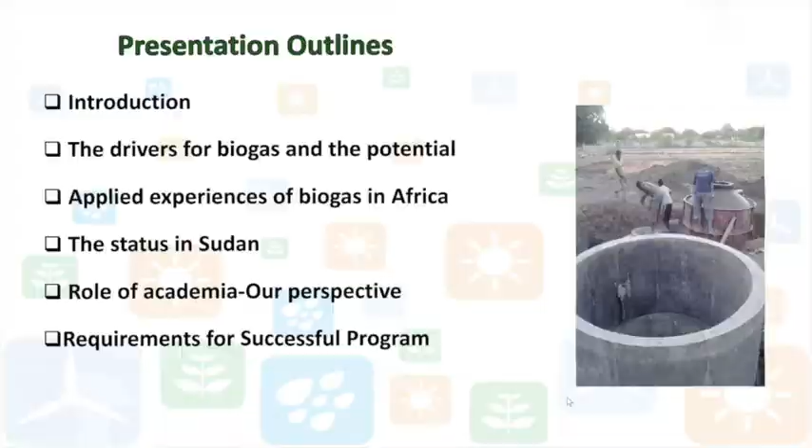So why is the development of biogas? Actually, I'm a mechanical engineer, and my PhD was in biofuels, producing biodiesel and biofuels and testing internal combustion engines. I finished in 2013. But in 2014, I went to Sweden to attend the WBA conference, World Bioenergy Conference.

And then I was very inspired by the Swedish experience in biogas. From the airport to the regional city where the conference was, the biogas buses were running on biogas. And in the field trip, we went to a biogas plant where a group of farmers, like entrepreneurs, collect the cow dung from different farms and bring it to the biogas plant, and they produce biogas. They upgrade this biogas to be fuel for the station, for the cars, and they also have a certified organic fertilizer.

And I was thinking, Sweden, with all the population in Sweden, it may be less than the people in Khartoum, the capital of Sudan. So we have a lot of waste. We have a lot of the biggest livestock in the continent, and also we have many other things that we need to do.

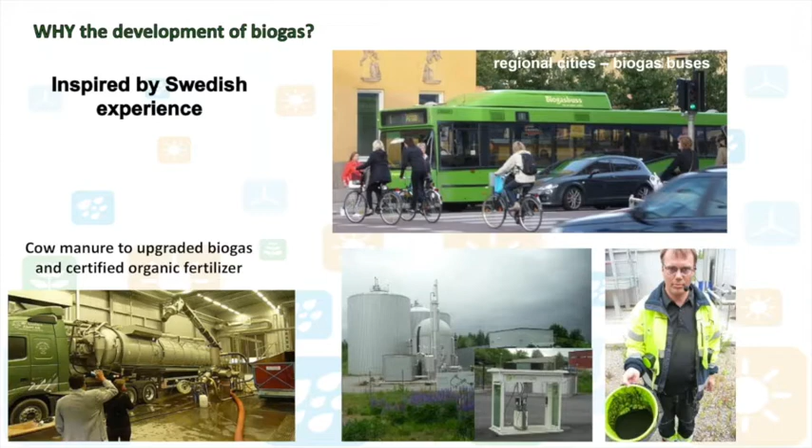So the first thing I looked at was the experience of biogas in Africa. I think most of you know the Africa Biogas Partnership Program, created in 2009, which is a public-private partnership between the national government in the country, and also with other organizations in Netherlands, like SNV, which is famous as a technical advisor for doing this in West and East Africa, and also the government of Netherlands, mainly the Ministry of Foreign Affairs.

So they established the Kenya Biogas Program, the Tanzania Domestic Biogas Program, the National Biogas Program in Ethiopia, and the National Program of Biodigesters of Burkina Faso. And they have a lot of successful stories - they installed many different biodigesters to produce biogas, mainly for households and rural areas, and maybe thousands of them are working now.

There was also a National Domestic Biogas Program in Cameroon, also supported by SNV, and a National Domestic Biogas Program in Rwanda, established in 2007. And also there are different initiatives in South Africa, Zambia, Sudan, and many other countries in Africa.

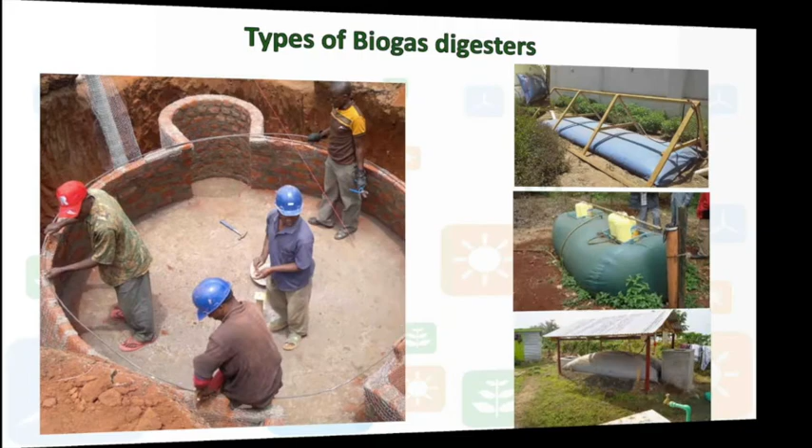And this is another type, an underground Chinese design in Zambia, shown in the left photos - different designs, but at the end doing the same job. And also this one in Tanzania.

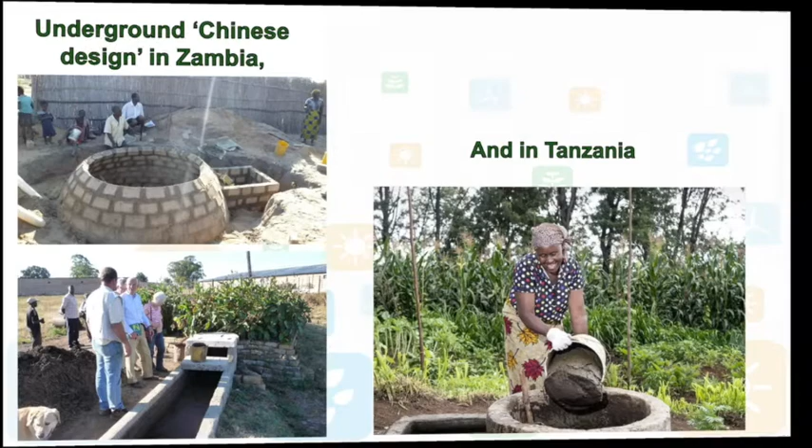The application of biogas is mainly for cooking, as we can see in the photos, and also for using biogas lamps. Sometimes the biogas is not enough for cooking only, so some people look for other solutions for lighting, but in the end we can use biogas for both lighting and cooking.

The benefit of biofertilizer or bioslurry can be used to promote home gardening and also increase the crop yield at different levels.

So I'm going to share some experience of biogas. This one is from Kenya, and this man is using the balloon, what you call it, flex bag biogas. Actually the design is originally from Rwanda. They produce the biogas on their farm from food waste and agricultural waste, and they compress this biogas using the compressor in the photo, and sell some of the compressed biogas to families as a substitute for LPG, and some of it they use as fuel for rickshaws, as in the photo.

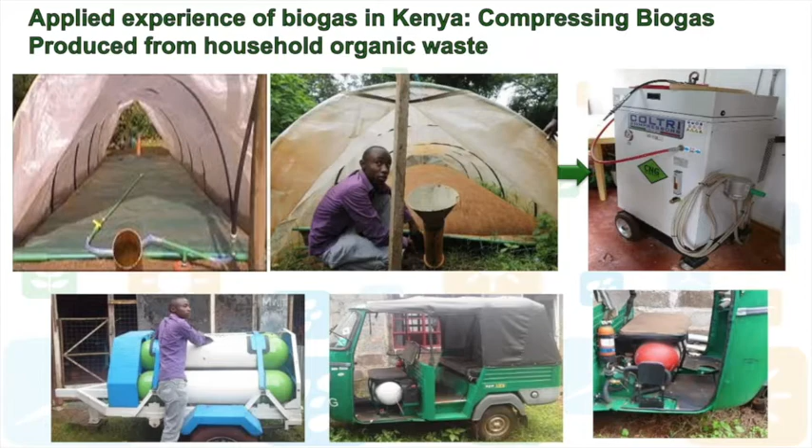This is another type, in a slaughterhouse in Kenya also. It's a very successful story - we went and visited this plant, it is a big one. They are using the waste from the slaughterhouse in a biodigester, which is the photo with the red and green. It's a Chinese design, also underground.

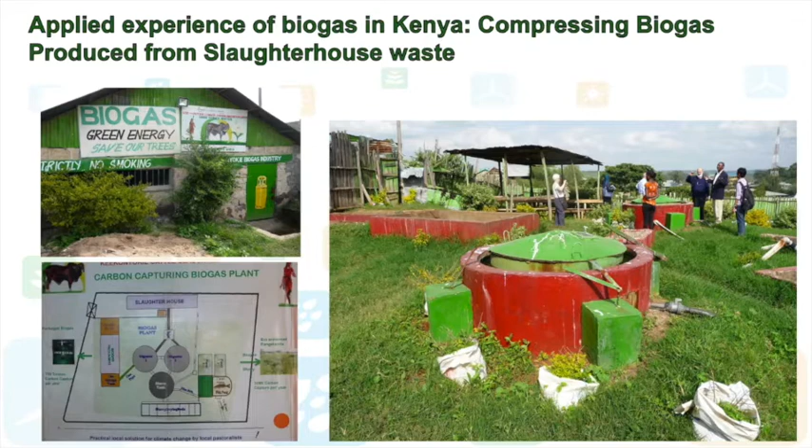So they use this to compress biogas - they developed these compressors on the left, designed by them, and if you can see, this is a small LPG unit. They distribute this LPG to the neighborhood as a community responsibility, because the slaughterhouse is big. They also use it inside the slaughterhouse to produce electricity with the generator on the right hand.

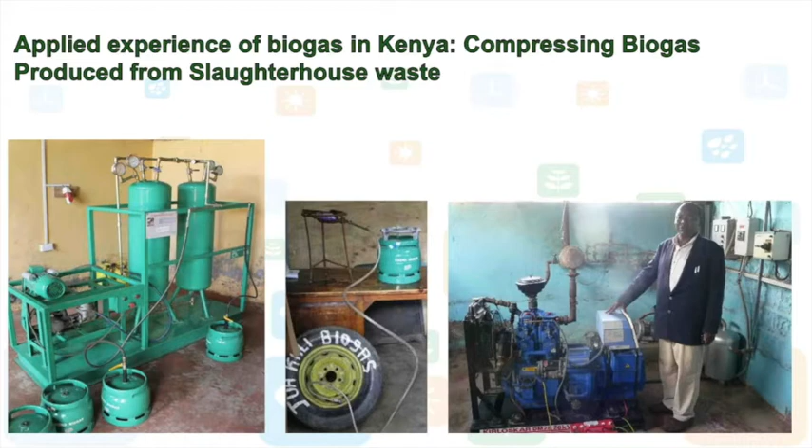The LPG shortage is now more than 42%. So we are importing, and using this mainly in the big cities. The rural areas are suffering from not having access to LPG, especially since Sudan is a big country, and LPG cannot reach rural areas. Now we are facing, even in big cities like Khartoum, people queuing to get access to LPG.

We also have increasing population growth - the annual change in population growth is 2.4%, which means the needs are increasing. And we have very fragile economic conditions to provide foreign currency to import more petroleum products, and so on. So we need options for self-sufficiency in the country. This status can also be applied in many other countries, to some degree, across the African continent.

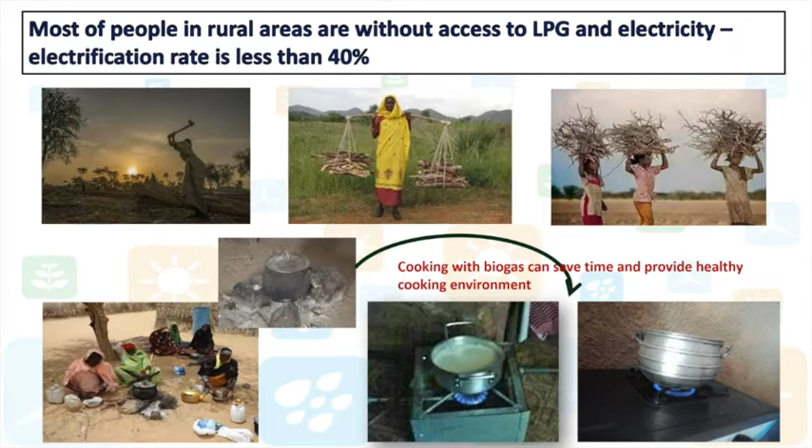Sudan is also suffering from a high deforestation rate, 2.2% per year, from using up to 30 million cubic meters per year of fuel wood. These photos are from different parts of Sudan, from the north, the middle, and also the east of Sudan. So how can we expect these areas will look in 20 or 50 years?

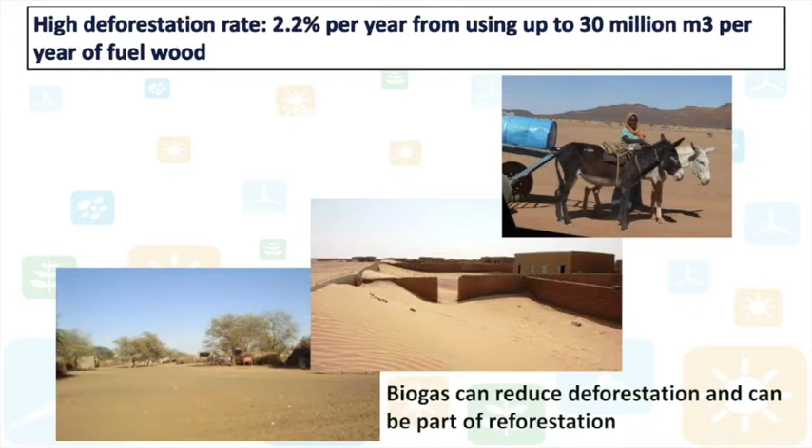So what was our approach? The very thing that we have done in late 2014, early 2015, that we called for a stakeholder consultation workshop.

We tried to understand why there is no development of biogas program in Sudan. So we brought all people that have done any activity in biogas, from academia, from the research institute, from private sector, and also any companies installing biogas units. We found just one company that started in Sudan in like 1980.

In this stakeholder consultation workshop, the main objective was to understand the barriers and prioritize the needs for developing biogas in Sudan. So we should have the need and the potential to start this program. After this workshop, we established our biogas research group, formally formed and sponsored by the Deanship of Scientific Research in Sudan University of Science and Technology.

So the second thing is to build real models and tell successful stories. Why? Because one of the things that came out from the workshop is that people are not aware about the potential of biogas.

The other model that we built in 2017 - going back to the last slide, that first model was built, but the cost was very high. It was really high because the cement, the labor, all this stuff increased the cost. So to promote the technology, we wanted to have cost-effective models.

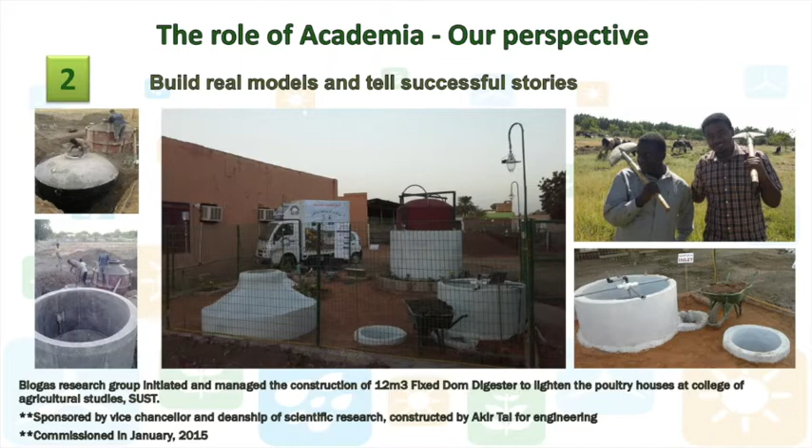We also tried to see the impact of different feedstock, like cow dung, and also a mix of cow dung and slaughterhouse waste, and also food waste available in the cafeteria at the university - different feedstock. So we tried to see the pressure of the gas at different levels and different temperatures.

We wanted to ensure that if this model was cheaper, would it still have a positive impact on the family? This 2 cubic meter biogas digester was also installed in engineer Faisal's house, rahimahullah.

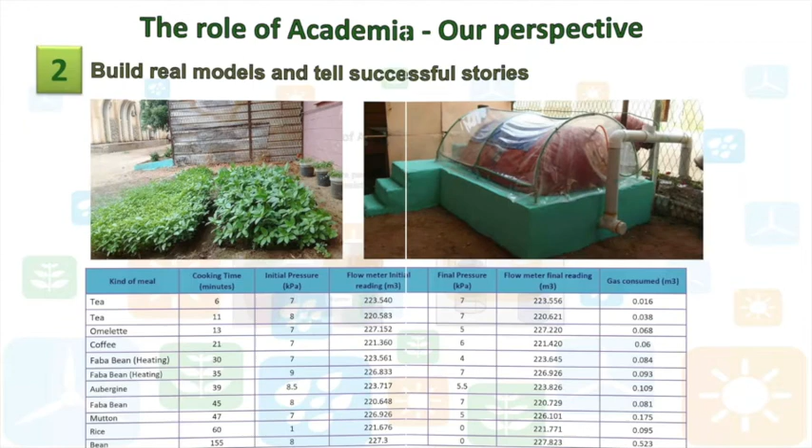Then we tried to do our research, and because we built these small models - another thing we are proud of is that we have our own biogas research lab. This lab was not only for doing research, but also to help other researchers from other universities and institutions come and do their research and understand how they can fabricate different models.

So we started with this one, and later we developed this one because we wanted to create solutions that are part of the community's daily life, culture, and their usual business - mainly to avoid resistance.

So this biogas unit in the photo was made mainly from a water tank available in Sudan. We use 250 liter.

We did all this after we finished our experiment in the lab scale, then we turned to this one with the research group, and we found it very good and useful to produce amount of gas. Yes, it is not enough for household, but we can enlarge the scale. We wanted to make sure the material and the fittings are fine, and the product, the biogas and the bioslurry, and everything is going fine, and also the safety of the unit. So we have done this at this scale.

Later we turned to 1 cubic meter, and 1 cubic meter was enough to produce like 1.5 cubic meter per day. So we found that it will help in cooking, because cooking with biogas depends on the meals that you are cooking. For example, if you are cooking this heavy porridge and other things famous in Africa, it will need many hours, so a lot of biogas. But the biogas may not be enough for lighting, so we have to look for a solution for this, and this we are going to see in the recommendation.

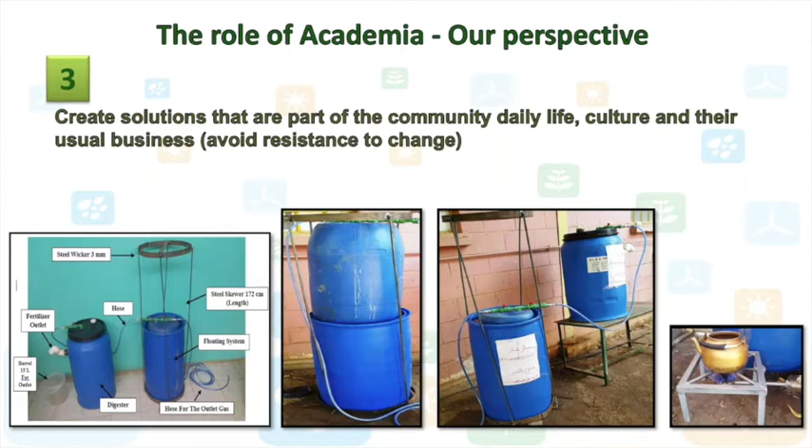So the other thing that we have done, we not only worked on the units in the lab, but also tried to promote the development of strategies for communication with different stakeholders and build the trust.

We need also to develop strategies before starting any biogas program.

They also used the biofertilizer to promote home gardening in Western Kordofan. The 10 biodigesters installed there made people really happy. They improved crop gardening and promoted home gardening, because most families in rural areas have large areas around their houses that could be used for home gardening.

The liquid from the biodigester can be used as fertilizer to irrigate vegetables. This has an impact on the family by providing food security, and it can also provide additional income by selling produce in the market or to neighbors. These photos are from Western Kordofan, and you can see how the crops improved.

In 2016, Engineer Faisal, rahimahullah, shown in the middle photo, installed two different plastic units of 2 cubic meters at his home. Since then, he has been using this biogas for cooking. He doesn't have any cow or chicken at home, but he uses food waste, and sometimes neighbors bring their food waste and put it outside the house, which is later put into the digester. Sometimes he would also bring cow dung from the slaughterhouse to add to the digester.

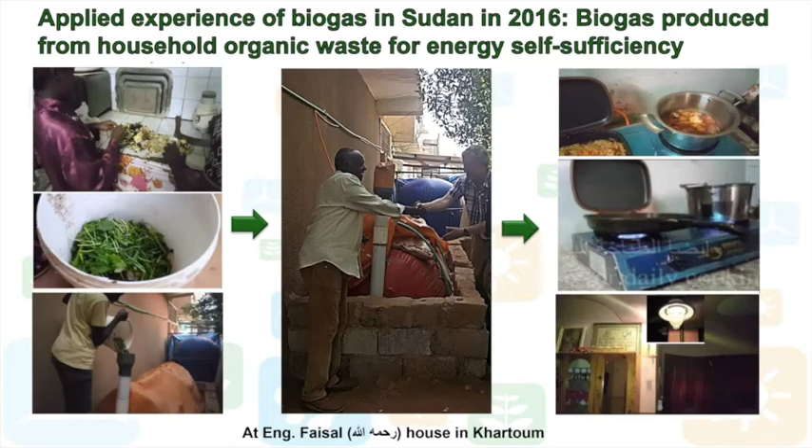So to promote biogas for household use, the first question people ask us is, what is the cost? And directly they compare the cost of the unit with what they pay for LPG, charcoal, or cooking wood fuel. But this is not the right way to look at it.

The household should calculate many costs. The first is the cost of cooking fuel: total cost of wood, charcoal, LPG, kerosene, or the cost of time to get the fuel. The second is the cost of the biogas digester. For the digester, yes, we have the initial cost, but we have to look at the cost over the lifespan of the biodigester.

For example, if the fixed dome biogas digester lasts for 25 years, I'm going to use it for 25 years, so I have to calculate the cost based on that. And if I'm going to buy a flexi biogas or plastic one, like the one I showed you in Engineer Faisal's house, it will last 10 to 15 years, so I have to calculate the cost based on this.

The household also needs to calculate the time to repay the cost of the biogas digester, because we usually say we have to build a business model for the household. The upfront cost will be quite significant, since we're talking about more than 250 US dollars, which could go up to 500 US dollars depending on the country and other factors. So this could be part of a microfinance program.

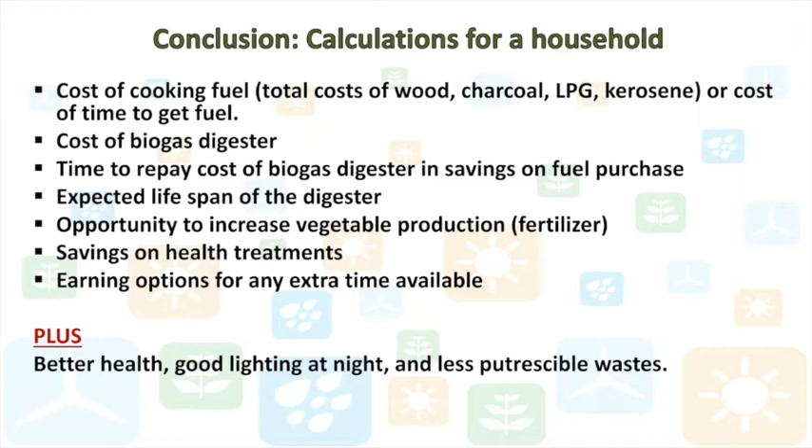We also have to calculate the better health provided to household people, the good lighting at night, and also the waste management that could be achieved by promoting biogas.

So needs for development, and these are lessons learned. Appropriate technologies: from Kenya experience, Tanzania experience, and Sudan experience, we need to integrate biogas for cooking with other renewable technologies.

When you produce biogas, how much feedstock do you have? Is water available? How much are you going to produce, and how much do you need from the biogas to cook? How many hours are you cooking, 4 hours per day or 6? Which type of meals? Based on this you will decide how much you need.

If the biogas is not enough, or only enough for cooking, then you need another source for lighting. So to make the house self-sufficient, biogas can be integrated with other renewable energy like solar PV for household, community, and agriculture, and also battery storage systems for small-scale solar PV and wind turbines in off-grid situations.

Sometimes for community-based biogas projects, people can share the biogas unit. Instead of installing a 3 or 4 cubic meter biogas unit for one family, they can share one bigger community unit. Also in farms, the biogas unit could be bigger. All these options should be looked for.

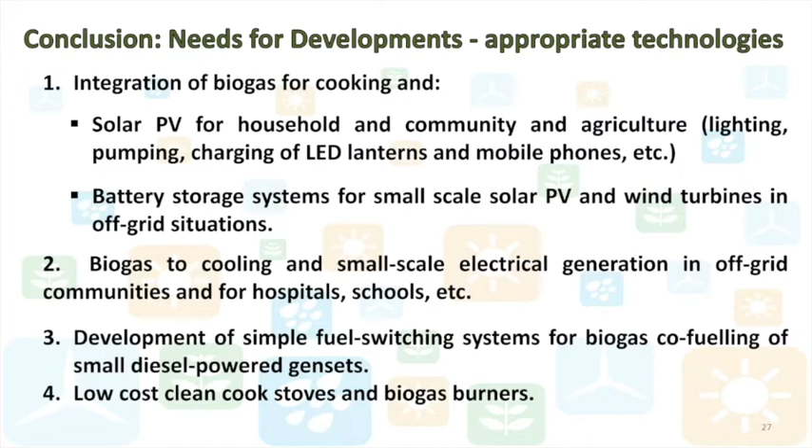Lesson learned: requirements for a successful program. As a core requirement for successful installation of a small scale biogas digester from 3 to 8 cubic meters, there are a number of critically important requirements, including access to finance for the household through some microfinance system providing low or zero interest loans to eligible applicants.

For example, when SNV starts a biogas program in Kenya, Burkina Faso, Ethiopia, or any other country, they start in partnership with the national program, and one of the requirements is there should be a microfinance program.

So they are not providing fully funded biogas digesters to families, but rather making the family part of the solution, and the family should pay. With the microfinance program, the cost is spread over 2 or 3 years, or up to 5 years, and it will be less because it could be supported by the government to promote this, providing subsidies and providing reforms like removing taxes, just to help this move forward.

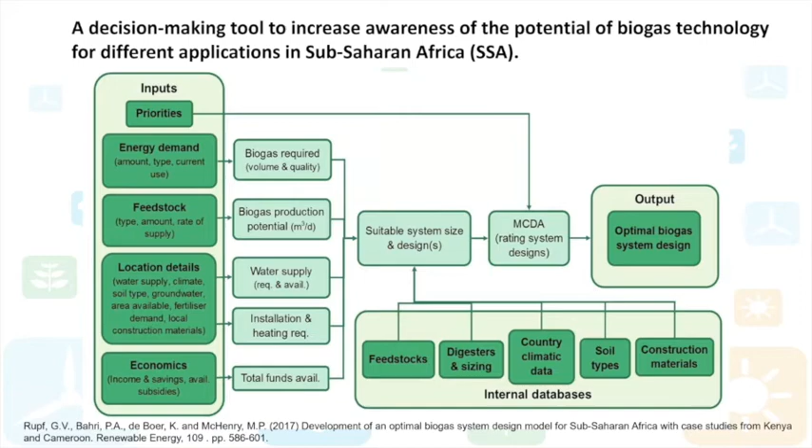This innovation in biogas development is not just a business or just to promote companies' products, but toward the three pillars of sustainability: environmental protection, because biogas development is part of waste management, and we all know how Africa is suffering from waste in big cities, small cities, and rural areas. It also helps social equity because it improves the life of families, and also economic viability. So biogas will bring energy self-sufficiency and improve rural economies.